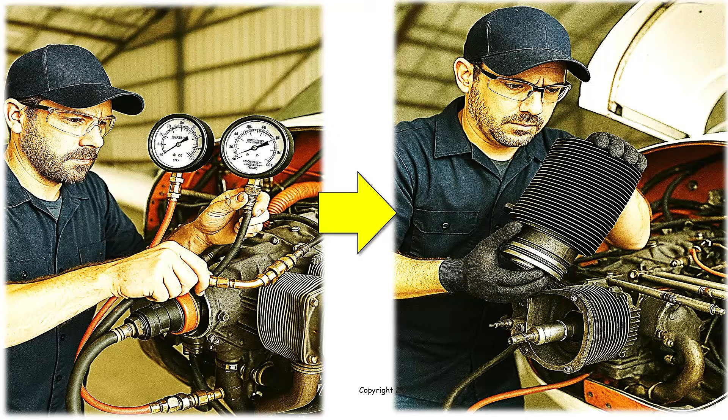But anybody who has been following the webinars or reading any of my writings knows that for years and years I've been preaching about the importance of using borescopes as the gold standard for evaluating cylinder condition, and trying to get people to change from the traditional approach, where at every annual, a differential compression test is done. If the cylinder passes the compression test, it's left alone. And if the cylinder flunks the compression test, it gets pulled off the engine.

It's kind of like if you went to your doctor for your annual checkup, and they checked your blood pressure, and if it was not right, then they would schedule you for open heart surgery. That's what we've been doing for our engines, and I've been trying to convince mechanics — and we're gradually starting to get some influence. It's really hard to get mechanics to change how they've been doing things, especially when this is what they were originally taught.

But we've been trying to convince mechanics to use borescopes more and rely less on the compression tester. In order to really move this thing forward, about a year and a half ago, on the 1st of January 2024, my company, Savvy Aviation, launched its Borescope Initiative. The Borescope Initiative involved a whole bunch of different moving parts, all having to do with trying to encourage the use of borescope inspections of piston aircraft engine cylinders and standardizing how we do those inspections. It was a pretty ambitious and all-encompassing initiative.

So, for example, we started off by defining a standardized imaging protocol. Nobody had ever sat down and written down how you're supposed to do one of these borescope inspections. It's funny — Continental, since 2003, has been saying that they require a borescope inspection to be done every time you do a compression test, which I think is a great idea. But Continental never wrote one word about how you're actually supposed to do the borescope inspection.

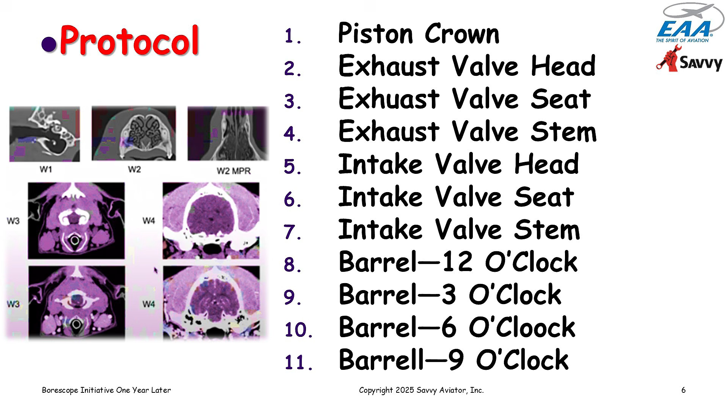Now, 11 images per cylinder sounds like a lot, and it really is, but it turns out that once you've done it a couple of times, you can grab those 11 images in about 5 minutes per cylinder. So the whole inspection of all the cylinders only takes about 20 minutes for a 4-cylinder engine and about 30 minutes for a 6-cylinder engine.

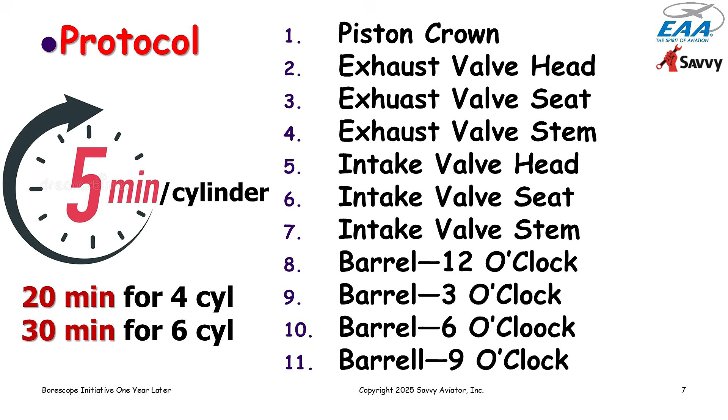So it really doesn't take much longer than doing the compression test, and it's a very thorough inspection. So after defining the protocol, we created a 35-minute video.

In which we demonstrated... Actually, my colleague Dave Pasquale, who is the guru of borescopy pretty much, demonstrated in a YouTube video how to capture each of these images, how to position the scope, what the image is supposed to look like, and so on.

We created a companion illustrated checklist so that mechanics would have something printed they could follow along as they're doing this. Once you've done it a few times, you pretty much have it in your muscle memory. But for mechanics not used to doing this, having the written checklist is pretty helpful.

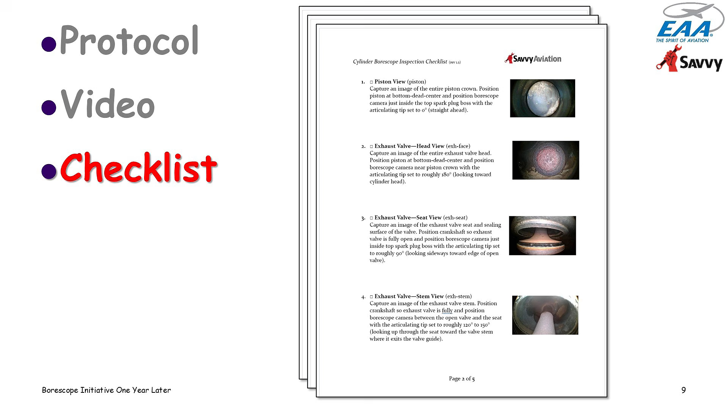Then once you get all of these images, we're talking about 44 images for a 4-cylinder engine or 66 images for a 6-cylinder engine. What are you going to do with all these images?

So we created a Borescope image repository, which was a software extension to our Savvy platform that provided an easy way to upload these images into the cloud, to tag them so you knew what each image was, what cylinder it was, and which of the 11 views it was.

And then once all those images were uploaded into the repository, we provided a way of going through and looking at the images, making notes about what you see, whether the images look normal or abnormal, and if abnormal, what the abnormality was, and so on.

And then a report generator for printing out a nice, pretty report with all of the images and all of the annotations that you made about the images, which you could print and include in the aircraft's maintenance records.

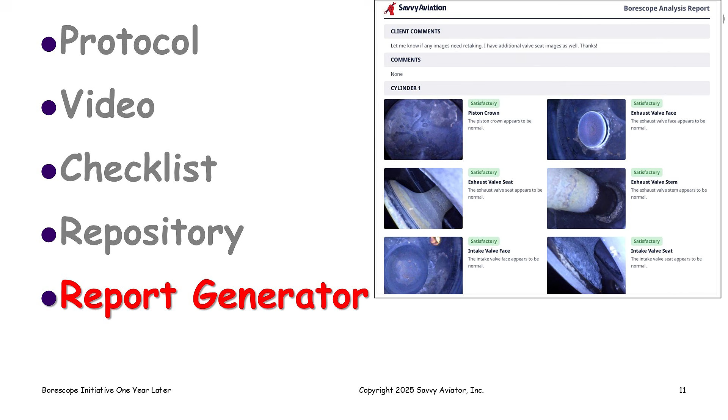And finally, for people who wanted us to look at their borescope images and render an expert opinion on what we see, we added a request analysis button on the repository, so that with a button click after uploading the images, you could ask a member of our analysis team to review the images and annotate them and indicate any abnormalities they saw.

And basically, we wanted this to be used as much as possible by as many mechanics as possible, so we made almost all of it free: the protocol, the video, the checklist, the use of the repository, unlimited storage on the repository, the report generator. All of that is usable by anybody who wants to use it at no cost.

You just have to create a free account on the Savvy platform so that you have a login, username, and password. And then you can upload images to your heart's content and play around with them, look at them, annotate them, generate reports, and so on.

The analysis service, of course, we had to charge for because it involves our analysis team spending time on it, but we don't charge very much. Basically, anybody who subscribed to the Savvy Analysis service, which had previously been limited to analyzing engine monitor data, automatically was able to request a Borescope image analysis as well at no additional cost.

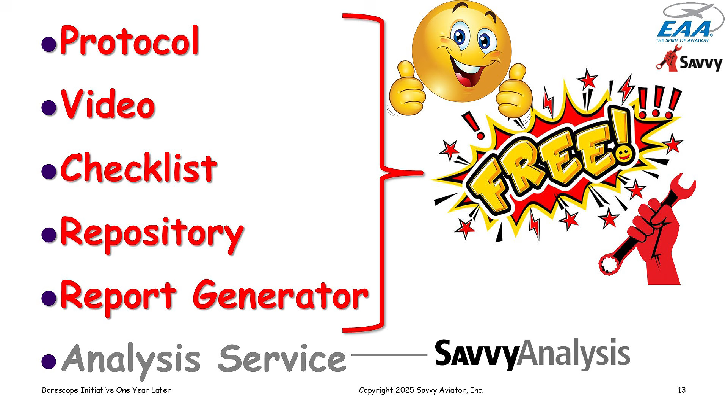So we launched all of this stuff about 18 months ago, 1st of January 2024. Fast forward 18 months to today, and we've gotten some pretty good use of this stuff, and we've learned some interesting lessons from it.

As of right now, we've had a little over 140,000 Borescope images uploaded to the Borescope repository on the Savvy platform. And actually, if you go to the website, this statistic and various other statistics are displayed.

So 140,000 images. If you assume all the uploads were complete 11-image-per-cylinder inspections, following the protocol, and you assume the engines were 4 cylinders, 140,000 images comes out to about 3,200 complete inspections. Now it actually turns out some people uploaded less than all 11 images, so the number of inspections is a little higher than that.

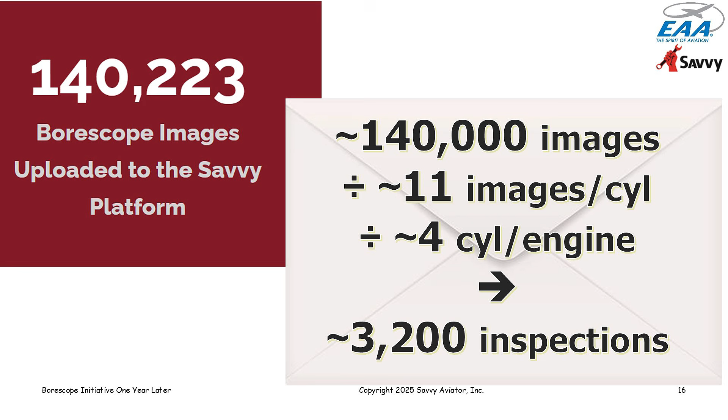But it represents a pretty significant number of engines being inspected, mostly using the Savvy protocol, because the repository sort of tries to guide you through doing things using the Savvy 11-image-per-cylinder protocol.

So now of this 140,000 images representing something over 3,000 engine inspections, we don't know the exact number, but 2,230 of them clicked the request analysis button. So our guys have actually looked at 2,230 engine inspections over the last 18 months.

And in the course of doing that, we looked specifically at 7,353 exhaust valves.

Now these numbers start to get kind of interesting. When they looked at the exhaust valves, 911 of those 7,353 valves appeared abnormal. They appeared to have some sort of heat distress, what people colloquially called burned valves.

And by the way, these numbers are all up on our website, and they're updated every 60 minutes. So you can look there and see exactly how this project is going along. We also have live statistics on the engine monitor stuff.

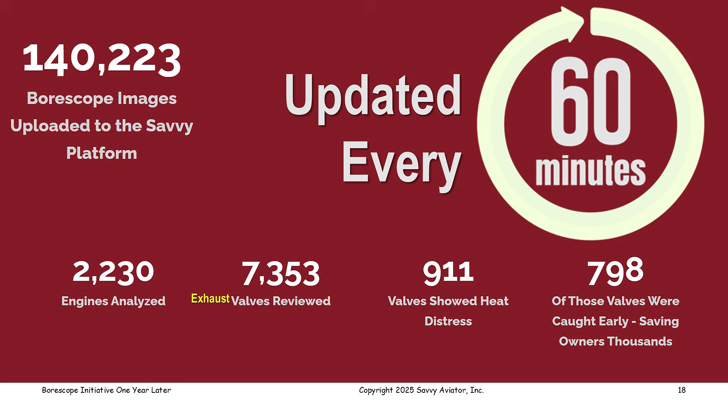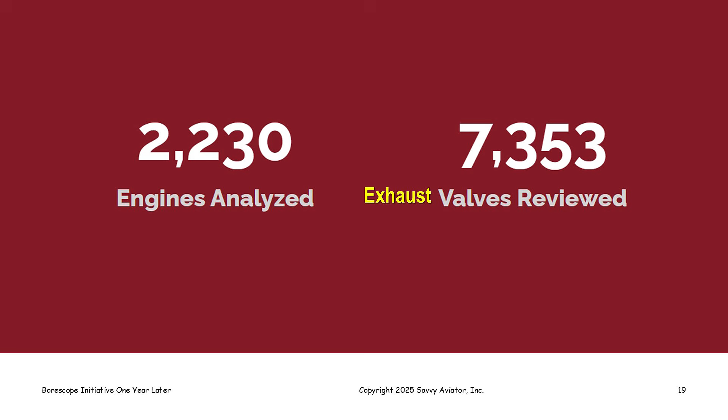So I want to drill down on these numbers a little bit and show you some of what we've learned. So again, we've looked at 2,230 inspections, and in the course of doing that, looked at 7,353 valves. And if you divide 7,353 by 2,230, you get a funny number. You get 3.3 exhaust valves per engine, which seems a little bit low.

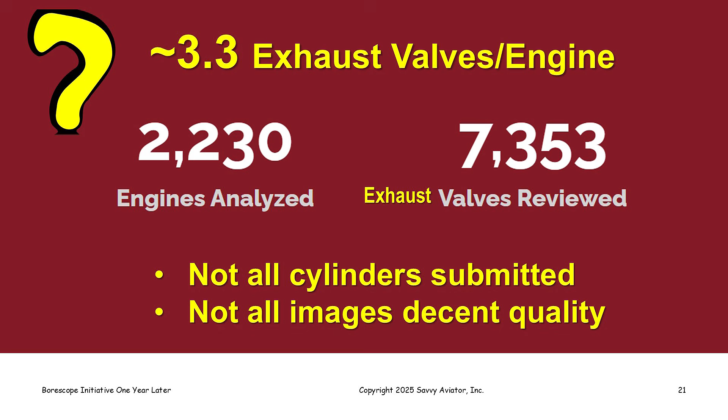And it's really because some people uploaded partial inspections and didn't upload the full complement of 44 or 66 images. And also because some of the images were not really reviewable because the image quality was inadequate. One of the things we can mark when we are going through this is that the image isn't good enough to render an opinion on because it's out of focus or it's not well lit or something like that. So that's why this didn't come out to be a number you'd expect, between 4 and 6, because that's how many cylinders we have on our engines. But it came out lower than that just because not all the images were good, and because not every person who uploaded an inspection uploaded it for all the cylinders.

So now if we look at the 7,300 and change exhaust valves we reviewed, 911 of them showed heat distress. And that indicates that something over 12% of the exhaust valves that we looked at were heat distressed. That's a surprisingly high number.

It may not be quite that bad because there may be some selection bias here. There's an argument that says people were more likely to upload Borescope images to the platform if they suspected something might be wrong. But certainly, I think it's fair to say that if you took a snapshot of all the airplane engines flying around out there, something over 10% of the exhaust valves would be starting to get in trouble, and that's a surprisingly high number.

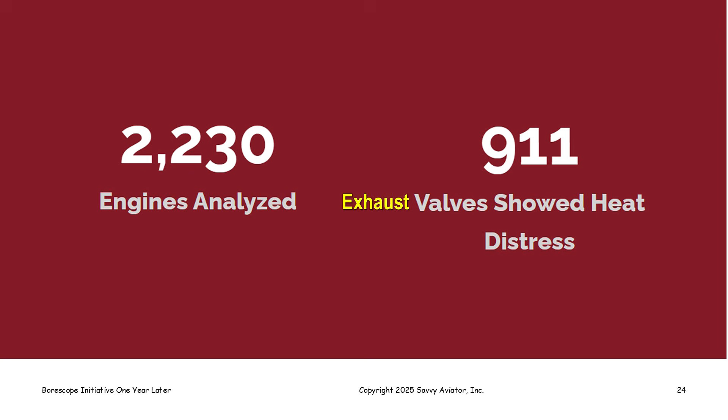Now, the other interesting thing is if you compare that 911 heat distress valves with the number of inspections we took a look at, which is 2,230, and you divide that out, it turns out that's somewhere north of 40% of the engines that we analyzed had at least one heat distress exhaust valve. And again, that number may be a little higher than what is actually going on, but I think it's fair to say that something over a third of the engines flying out there have at least one valve that's in trouble. And again, that's a surprising result. If I had to guess, I would not have guessed it would be that high. So it was quite interesting.

So at any rate, we come to 40.9%, maybe lower that number a little bit based on possible selection bias, which of course we can't really measure.

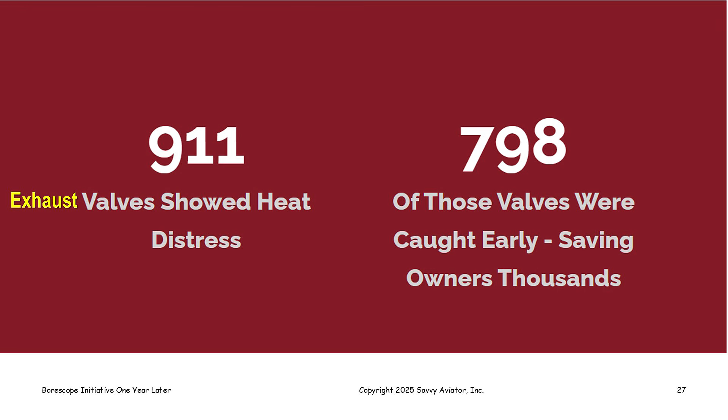But here's the good news. Of the 911 heat distressed exhaust valves that our analysts looked at, we ask them when they're looking at exhaust valves, if they find them abnormal, to classify them as either early stage or late stage heat distress. And of the 911 heat distress valves they looked at, 798 of them were early stage, which is just really very, very good news. It means that almost 90% of the heat distress valves were caught early enough that the cylinder probably didn't have to come off, that the valves could be resolved simply by lapping in place. And of course, I've done webinars on how you do that and so on. We've had almost 100% success in lapping valves in place.

The hardest part we find is convincing mechanics that it's okay to do that, because it's not in the service manual anywhere. It's like, well, how can we do this if it's not an approved procedure? Well, if you look at the regs, it doesn't have to be an approved procedure.

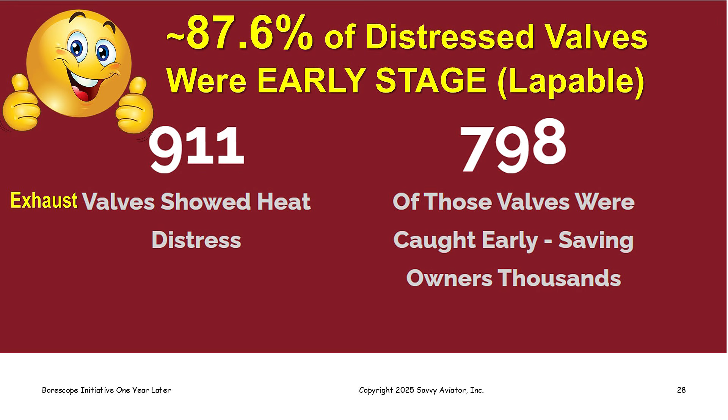It only has to be an acceptable procedure. But at any rate, the vast majority of heat distressed valves that were caught in these borescope inspections were caught early. This is the big advantage of using the borescope rather than the compression tester, is that we can catch these things much earlier, and we can catch them early enough that we probably don't have to remove the cylinder.

We can remediate the problem in a much less expensive and less invasive way. So we're talking about the difference between, if we catch it early, lapping a valve in place, which is roughly $200 parts plus labor. There's basically no parts, just some grinding compound, some Q-tips, and an electric drill. There's an hour and a half of labor or so involved in lapping the valve, so figure somewhere in the order of $200.

Whereas if the cylinder comes off, which has been the traditional remedy when the valve got in trouble, you're talking about somewhere between $2,000 and $4,000 parts and labor, depending on whether the cylinder is simply pulled off and sent out for repair, or replaced with a reconditioned cylinder, or replaced with a new cylinder. So there's a fairly wide range of costs involved, but they're all expensive and they all have 4 digits on them.

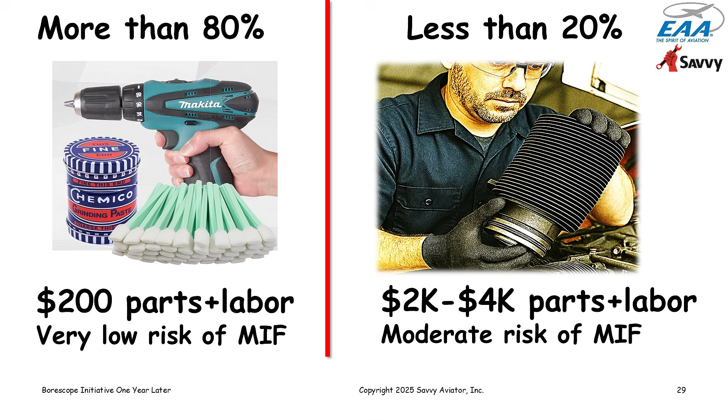So the fact that close to 90%, and even allowing for selection bias maybe more than 80%, of the cylinders don't require removal because the valve problem was caught early enough that they're good candidates for lapping. In fact, the situation may be even better than that, because in our experience, even late stage valves can sometimes be rescued by lapping in place.

As an example of that, an A&P friend of mine named Ashley Blythe sent me this photo of a valve. It was a number 4 exhaust valve in a Continental IO-550B that was on a Bonanza. The engine was about 500 hours since major overhaul.

In the borescope inspection it looked like this: pretty profound hot spot on the valve in the 11 o'clock position, turned green, which is usually a really bad sign. Pretty much anybody who knows anything about borescope inspections would look at this image and say this is a late stage valve. It's probably not a good candidate for lapping. Most likely the cylinder needs to come off.

Well, this particular Bonanza happened to be one that Ashley flies himself, and he's a big fan of valve lapping and very experienced at it. So he figured, before I pull the cylinder, let me just give lapping a shot and see what happens. He didn't expect it to be successful, but he figured he was willing to invest an hour of sweat equity into trying this out before taking the step of removing the cylinder.

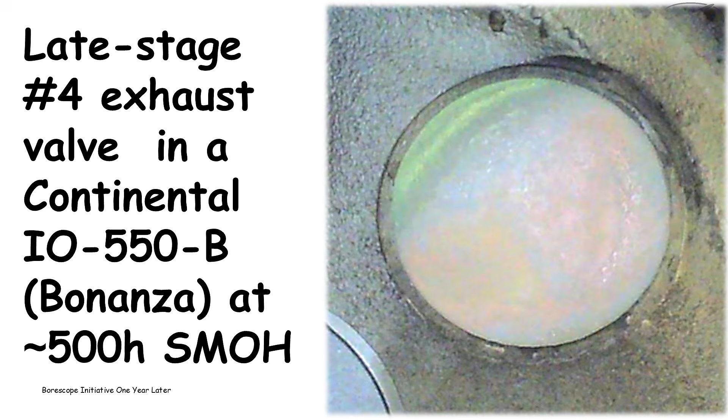I would still want to check it again at 15 hours and make sure that it looks perfectly symmetrical. The compression on the cylinder after the lapping went from the 50s up to the 70s, and this valve very likely was restored to health, even though it seemed to be in pretty bad condition. So even valves that are in pretty bad shape, it's probably worth giving lapping a try.

And for the 80 some odd percent of the valves that are caught at the early stage, we have almost 100% batting average in getting them resolved through lapping in place without having to remove the cylinder. So even with late stage valves, it's usually worth trying lapping first.

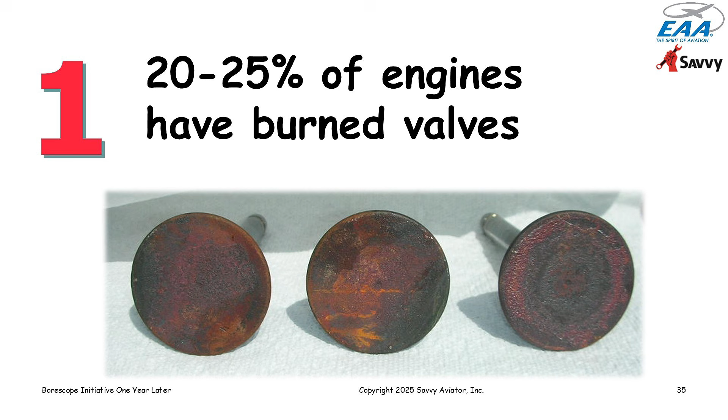So a lot of engines have distressed valves, a surprisingly large number, and the vast majority of those can be caught early enough by doing regular borescope inspections that they can be fixed by lapping in place for a couple hundred dollars, avoiding cylinder removal.

On Continental engines particularly, anytime we lap the valve, we also replace the rotocoil, the little thing that rotates the valve, simply because those things are frequently the cause of the failure. It's a fairly frequent cause of heat distressed valves—certainly not the only cause, but it's one. And rotocoils are quite inexpensive, so while you have the valve train apart for the lapping procedure, it just makes sense not to put the old rotocoil back on, but to put a new one on.

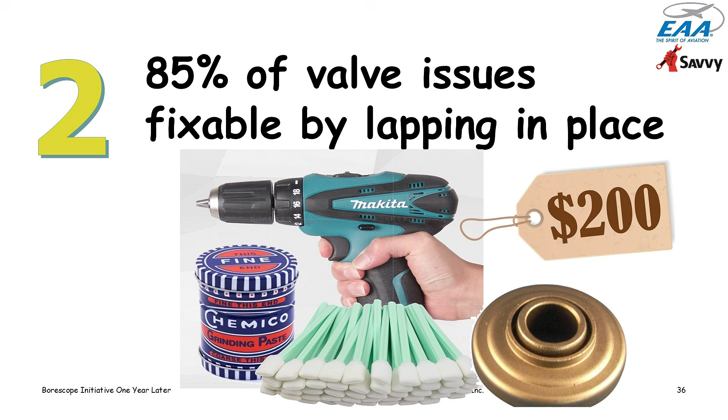And the key is to do regular borescope inspections, which give us the ability to catch these distressed valves early enough that the likelihood of being able to fix them in a non-invasive way through lapping is very high, and the necessity of cylinder removal is drastically reduced.

And as I said, a thorough borescope inspection only takes 20 or 30 minutes, even if you do the full 11-image-per-cylinder protocol. It'll take longer than that the first time a mechanic does it if he's not familiar with these inspections, but once he's done it a time or two, it goes quite rapidly.

And the interval, how frequently these borescope inspections should be done—we think they definitely need to be done no less frequently than every 100 hours, and ideally every 50 hours. Certainly any time a spark plug is out for cleaning, gapping, or rotating, you definitely want to stick a borescope in the hole. It just doesn't make sense to remove a spark plug and not take a look in the cylinder with a borescope.

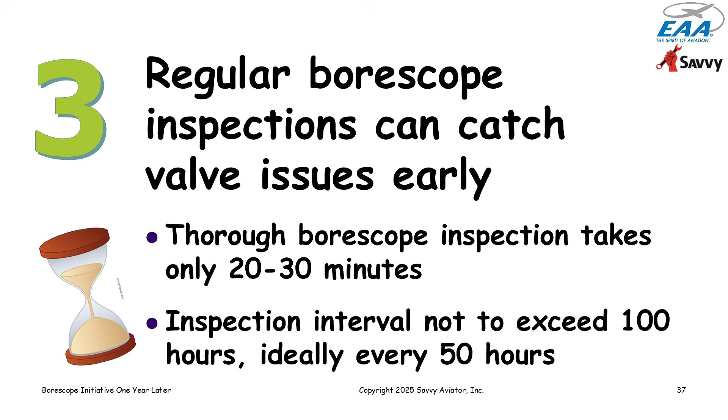Several people were wondering, is there any breakdown of which type of engine, like Continental versus Lycoming, in terms of the numbers, like anyone more susceptible to having exhaust valve burning, according to the data?

I actually don't have those numbers handy. They would be easy for us to derive. I know I can answer from experience that the Continentals tend to burn valves more often than Lycomings. Lycomings tend to stick valves more often than Continentals. Name your poison. But yeah, the heat distress of valves is more frequent with Continental engines than with Lycomings in my experience.

And the reason is that the Lycomings use sodium filled exhaust valves that do a better job of removing heat from the valve head through the sodium filled valve stem. Continentals use solid stem valves, so they are more dependent on the contact between the valve and the seat for dissipating the heat. So Continentals just do seem to burn valves more frequently than Lycomings do. I wish I could quantify that for you. We certainly have a lot of data. I just didn't happen to do that calculation.